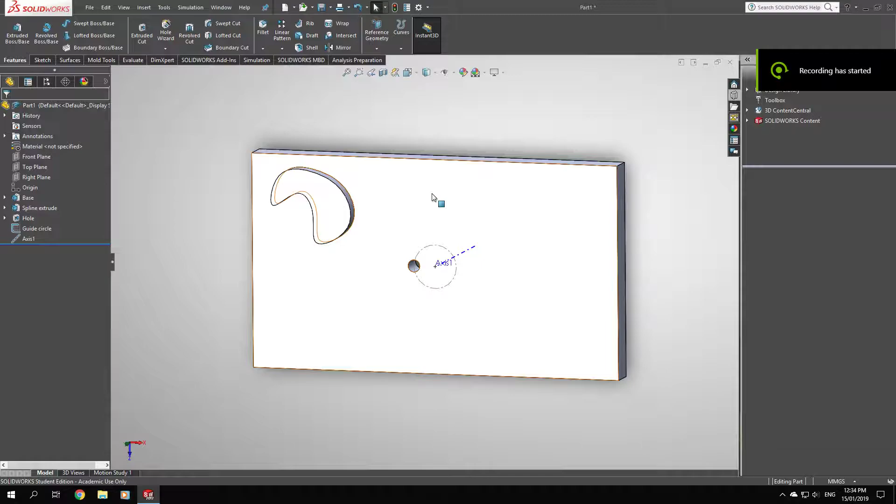Hey Internet, today's lesson is patterning, so linear and circular. I use mirror as well. I hardly ever use curve and sketch, and I never use these three because they're really math dependent and you really need to know what you're doing to use them. So we'll just cover these two today.

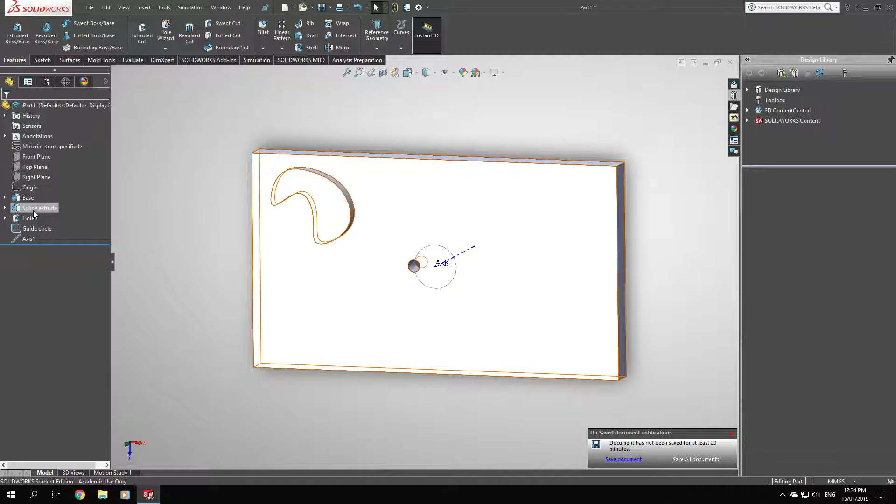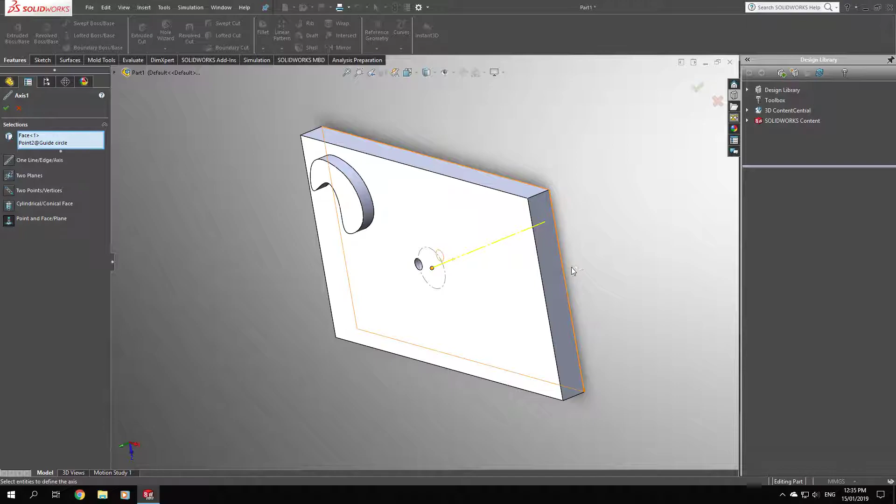So I got my basic base and I got my spline. I've got my hole and I made a guide circle and I made an axis. So to make an axis, you just use reference geometry and just go axis. What I did was I first made the guide circle on the origin, and I just picked point and plane, and I picked the origin point and then just the back of the base, and we'll just exit out of that because it's already pre-made.

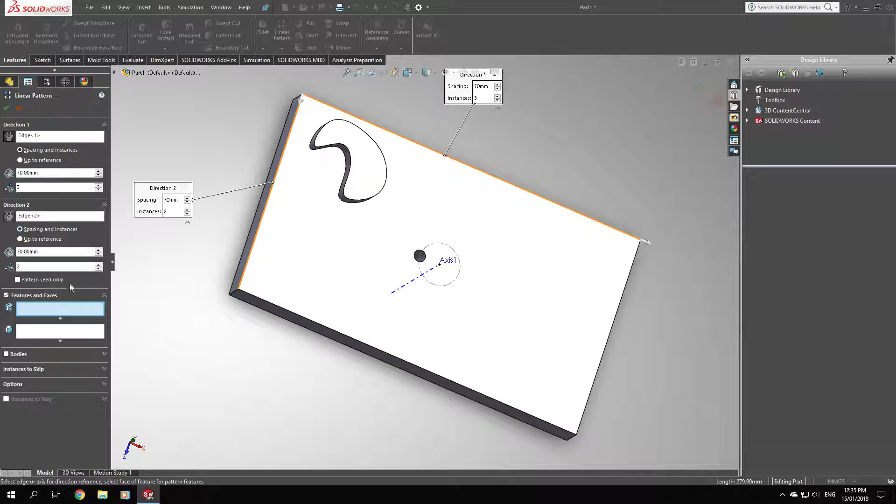Alright, so we'll start off with linear patterning. So direction, we want to go to our right, and I've preset 70 distance. In our second direction, we want to go down. So the feature that we want to pattern is our spline extrude. As you can see, there's 3 across and 2 down. So it's going down once and it's 3 across.

Alright, so obviously we don't want these two because they'll interfere with our circular pattern later on. So what we're going to do is click skip. So instances to skip. So just click on this purple pink dot.

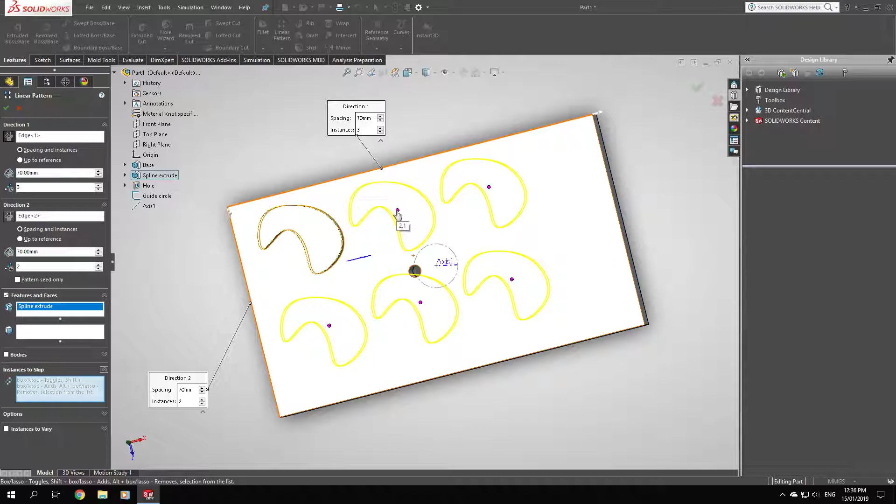My apologies if you're colorblind.

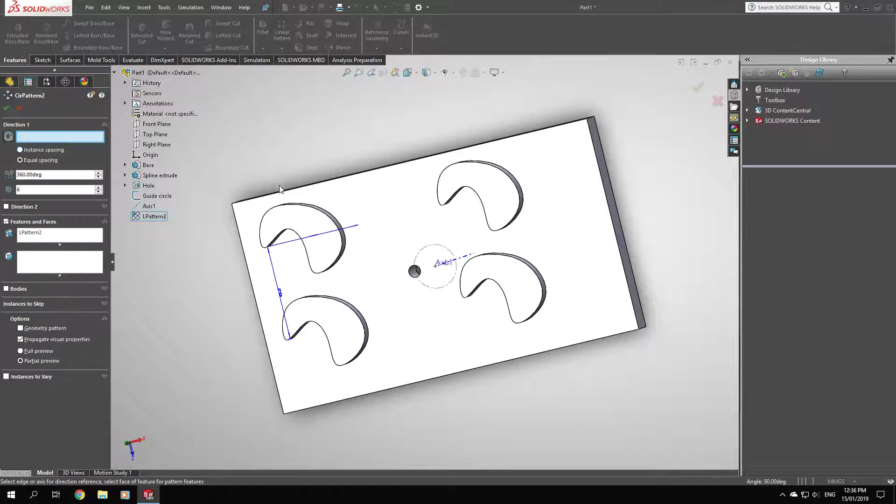Okay, so here's our pattern, and now we'll move on to circular pattern. So the direction, it will ask for the axis. So this is the axis that we pre-made, and whoa, that looks kind of funky. 360, and that's not what we want. That's probably the reason why. So we just want the hole

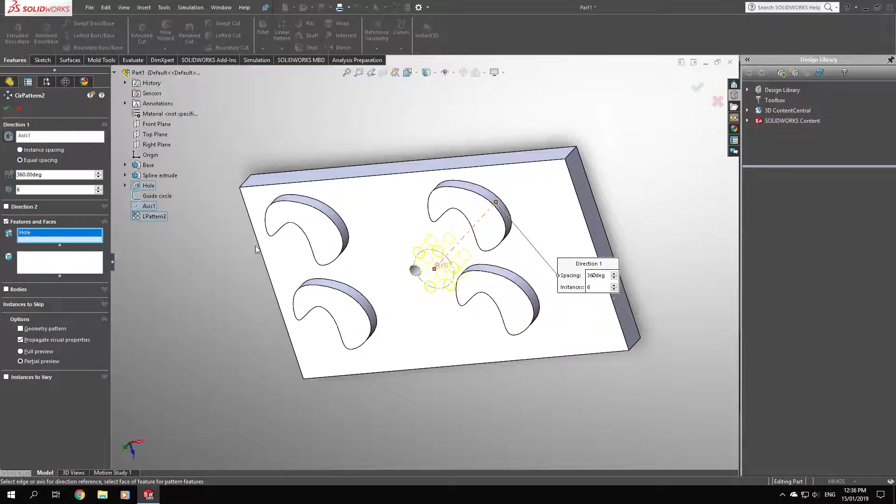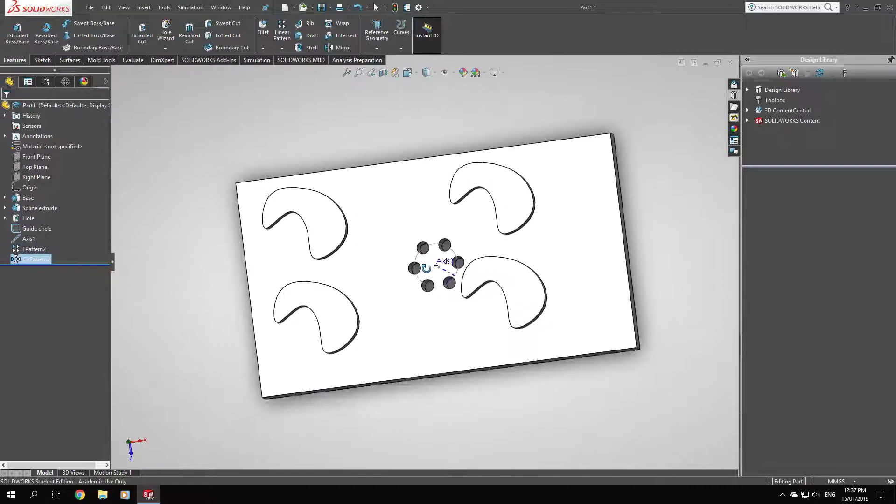360 equal spacing. And for more professional SolidWorks users, they usually just don't make the guide circle, but since my imagination level is like tier 1, it's not great. I use it to spot out where the holes are going to be. So if we make it, so that's our hole pattern, and we can just go to our guide circle and just hide the guide circle.